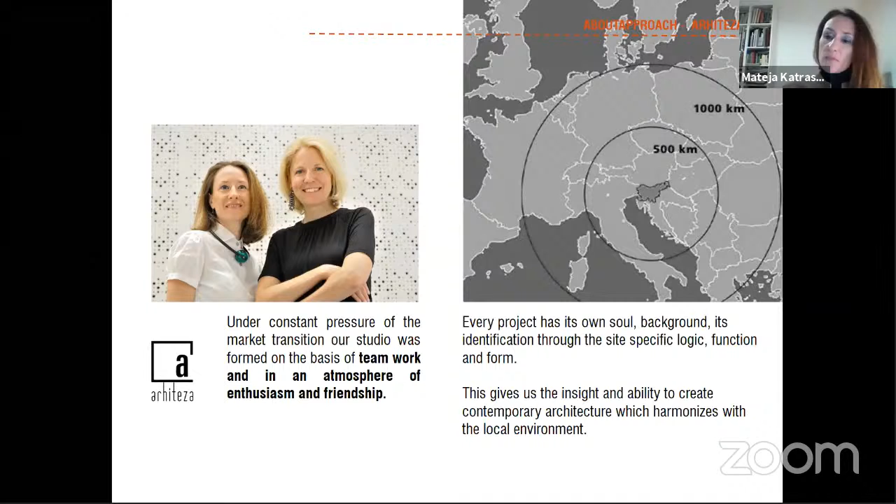We try to find background, we try to make identification through the specific site logic, function, and form. That gives us the insight and ability to create contemporary architecture which harmonizes with the local environment. This approach is very important to us.

So about the whole approach, we try to redefine the relationships between culture, environment, structure, and space. We take inspiration from visions of the future and traces of the past. Our approach is to find the most appropriate concept and try to create new value. Sometimes it's a redesign, and sometimes it's a research undertaking. Sometimes it's an evolution, and sometimes a revolution.

Now I would like to say some words about skate parks as architectural objects, because they are very specific. They are different to other sport arts.

Skateboarding does not have a particular standardized form, and that gives the designer, the architect, the freedom of expressing their own creativity. But at the same time, there are some standardized rules that have to be followed regarding set distances between skating elements. There are three categories of designing a skate park: bowl, street plaza, and flow.

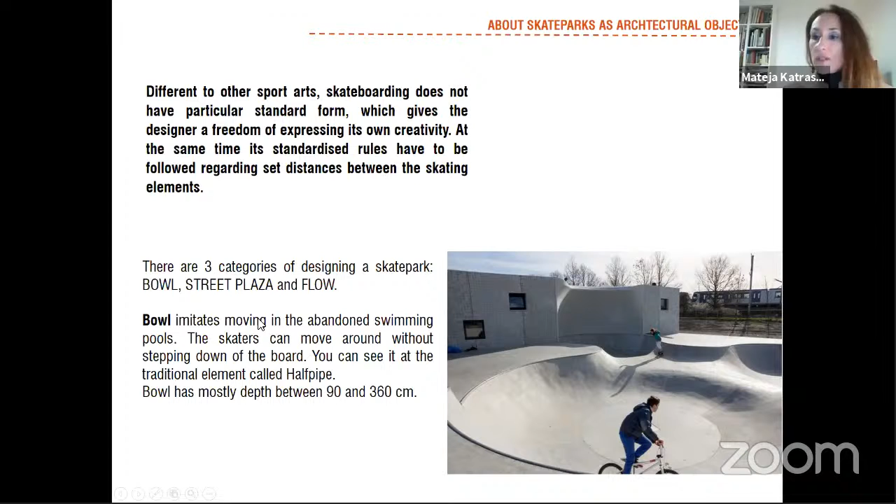Then we have two other forms. One is street plaza. This is a discipline where skaters imitate moving on the streets in the urban surrounding. They make tricks at various elements, and this is not as fast moving as in the bowls, so they also have to step down to push themselves to gain speed.

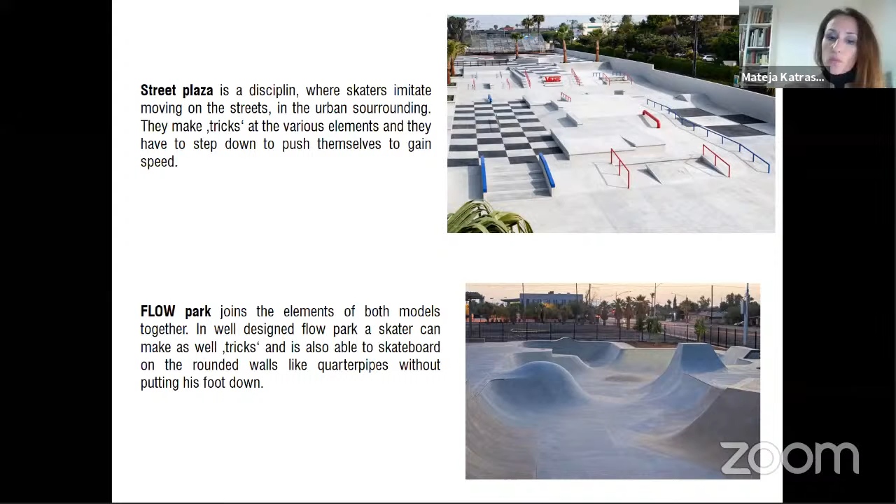Then we have the flow park that joins the elements of both models together. In a well-designed flow park, a skater can make tricks and is also able to skateboard on the rounded walls, like quarterpipes, without putting his foot down.

Now, let's say some words about Maribor, about Slovenia. Slovenia is a small country between Italy, Austria, Hungary, and Croatia. Maribor is the second largest city in Slovenia, located at the crossroads where various important roads converge. It is at the end of the Alps and at the beginning of the Pannonian plain, so this position provides the city a special character. In the former country of Yugoslavia, it was a very important city, a very important industrial center.

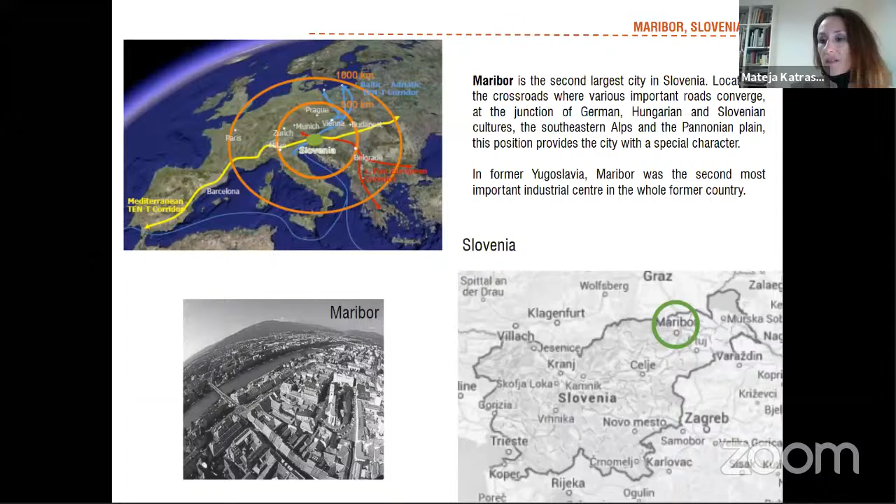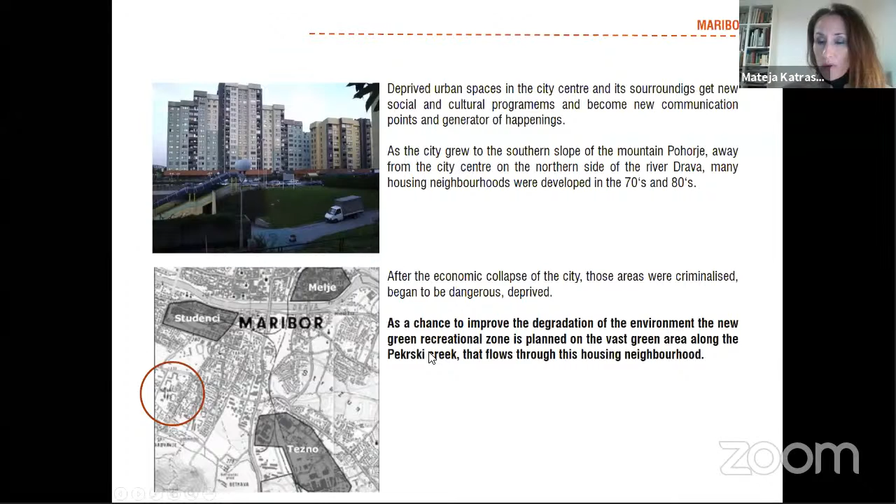Today, Maribor offers various opportunities for social and sports interchange. It is a historical, industrial, cultural, and economical center of the Styria region. The industrial collapse, deep concern regarding social problems, and somehow artificial maintenance of public standards are today more or less remembrances of the past, leaving an empty space for a new spirit that would provide the city with a unified, motivational identity and image.

Now let's come to the wider area of the location. The area of intervention is located to the south of the city. The skate park is part of the new green spine along the Pekrski Creek that runs through this urban area.

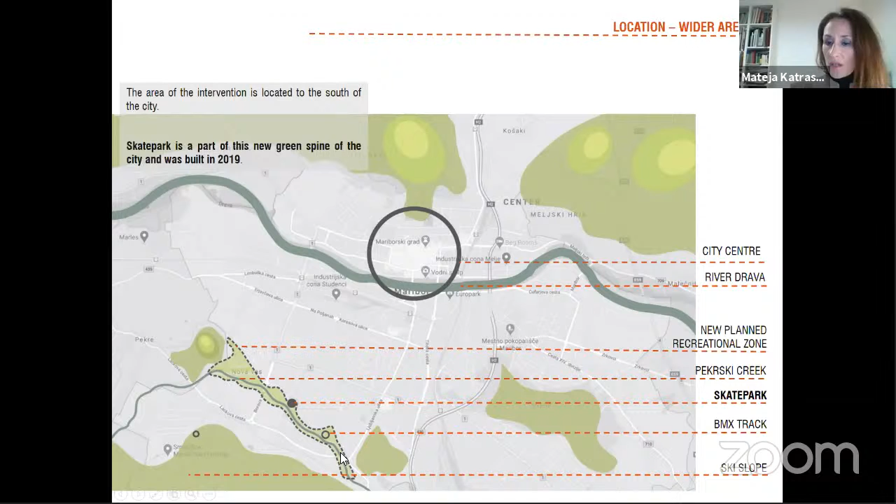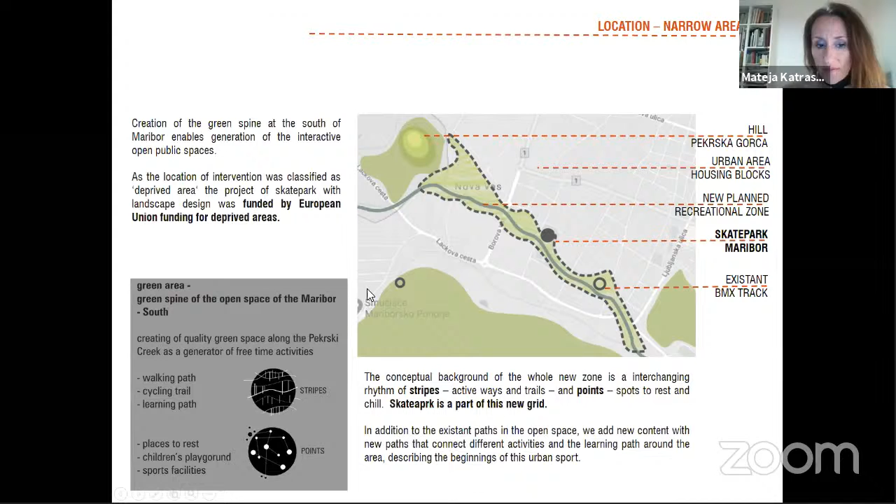Here is the location of the narrow area. We have a small hill, Pekrska Gorca, and an existing BMX track. In between is the new planned recreational zone between the urban area of housing blocks. Creation of the green spine at the south of Maribor enables generation of interactive open public spaces. This project, as the location of intervention was classified as a deprived area, was funded by European Union funding for deprived areas. The concept was living with the landscape and adding new contents along the recreational zone.

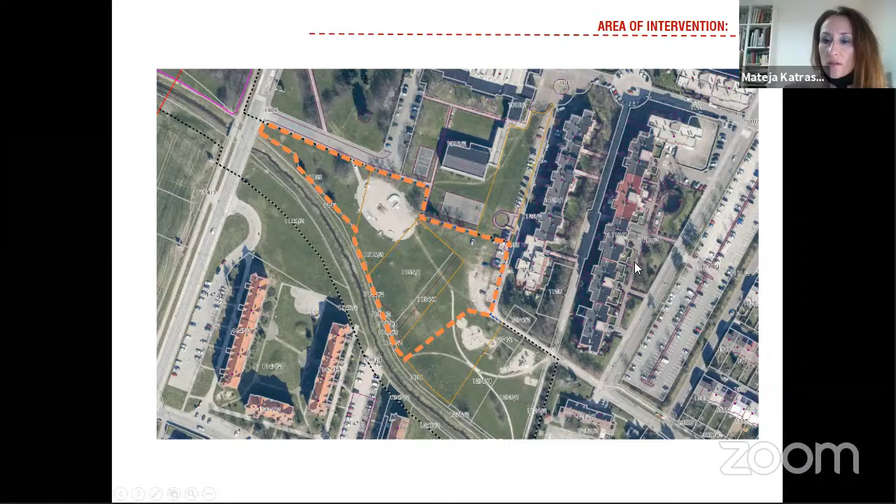Now, when we go closer, this is the area of intervention between housing blocks. We can see the zoning of the area. The concept divides the area into three zones. The central zone is the clubhouse, which appears as a connecting element between the two other segments. We have the children's playground and a new path with landscape design, and in light gray, marked the location where we put the skate park.

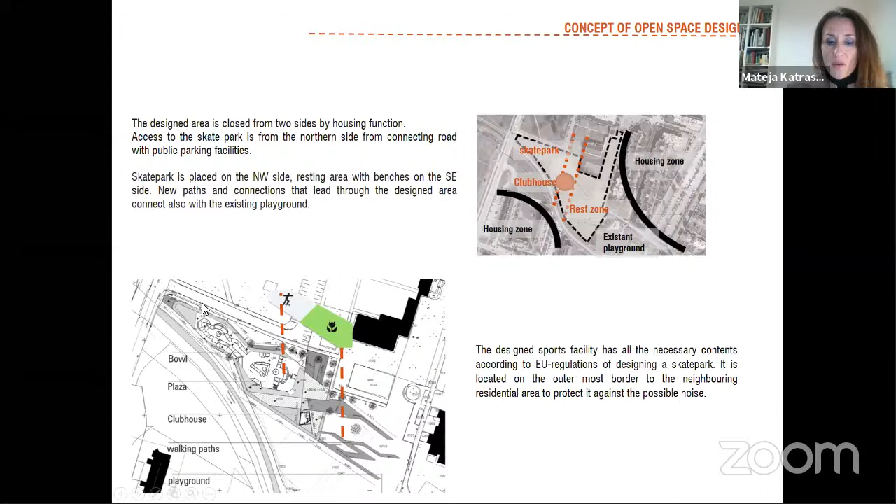The designed area is closed from both sides with housing function. Access to the skate park is from the northern side, from the connecting road, and with already existing public parking facilities. Here we can see the placing of the skate park and the landscape design, the concept of the open space design. In the western part we place the skate park. In the southeastern part we connect with new paths and new seating facilities, and we connect with the existing playground in the southeastern side.

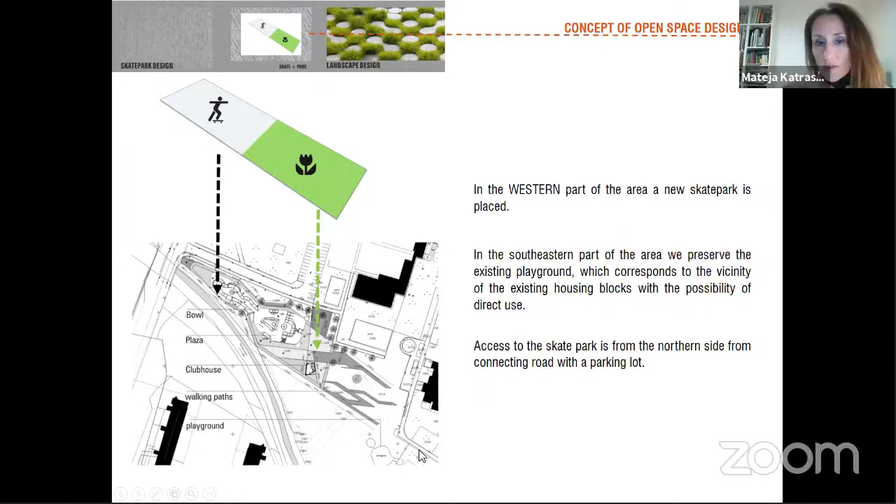To go wider into the skate park design, the design is based on the relief and natural features of the existing green area. The shape of the sport facility is designed according to the existing tree fund.

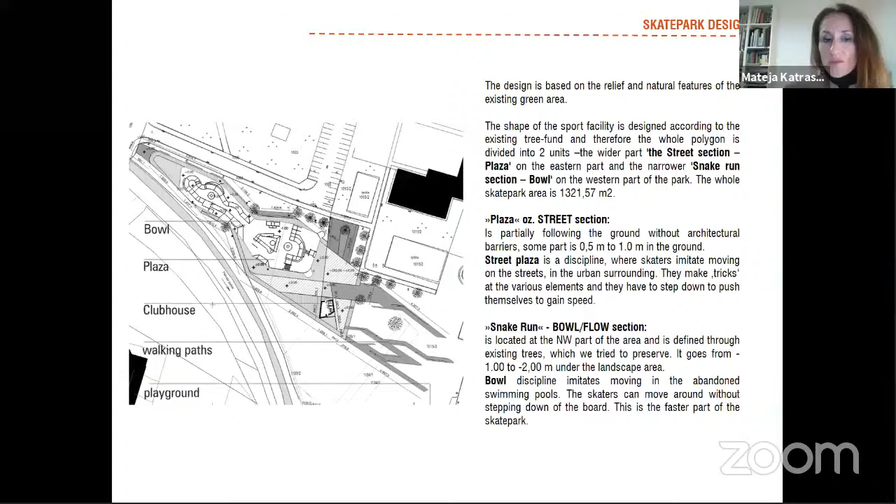So we go to the central part, a little narrower. We have two units, plaza and bowl. The plaza, or street section, is partially following the ground without architectural barriers. It comes from the clubhouse site and goes from ground zero minus 0.5 to 1.0 meters into the ground. Then we have the bowl, or snake run, in one part located in the northwestern part of the area, and this is the quicker part — here it's moving much faster than in the plaza.

Here you can see the skate park elements. It was designed according to European regulations and standards for designing these sport facilities, and also according to regulations, new public lighting was made, enabling international skating competitions during daytime with less sunlight. I have to say that from this year, skateboarding is also an Olympic discipline, so it should be in Tokyo next year for the first time.

Now, if we go to construction: this skate park is designed as in-situ casting of concrete on the spot. During construction, the shotcrete technique was used for injection of molded concrete with a thickness of 15 centimeters. This is the first object made with this technique in Slovenia. At the beginning, an excavation was made, and after that the construction was divided into two segments, the flat part and the oval part, each made separately.

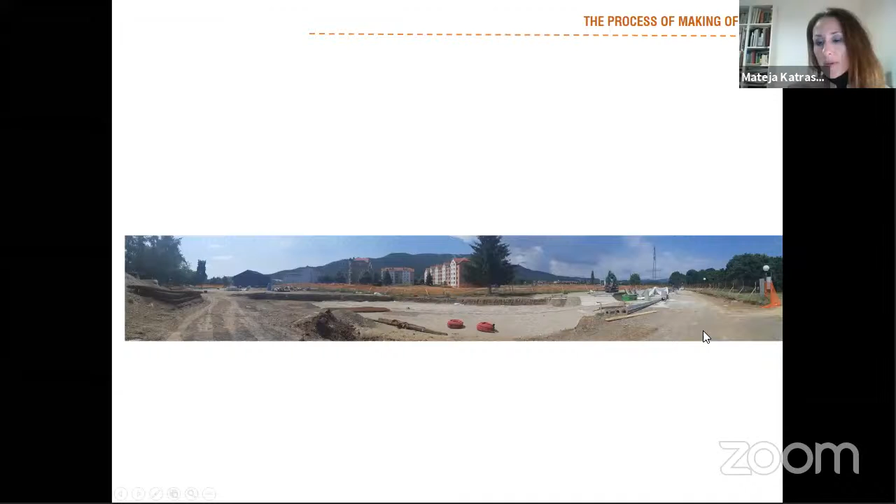Now we'll take a look at how it was made. These are the basic excavations that were made. You can see here the snake run part.

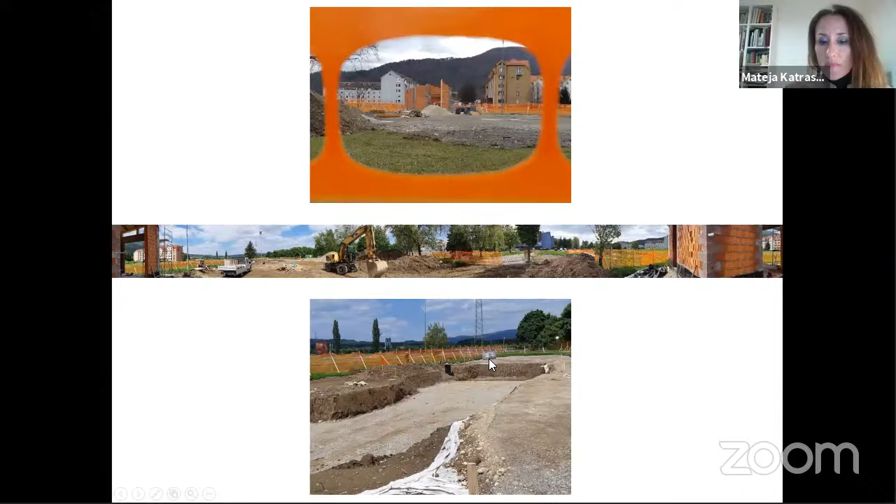What concrete has to be used for foundations? It was C16/20, and for riding surfaces, it was C35/45.

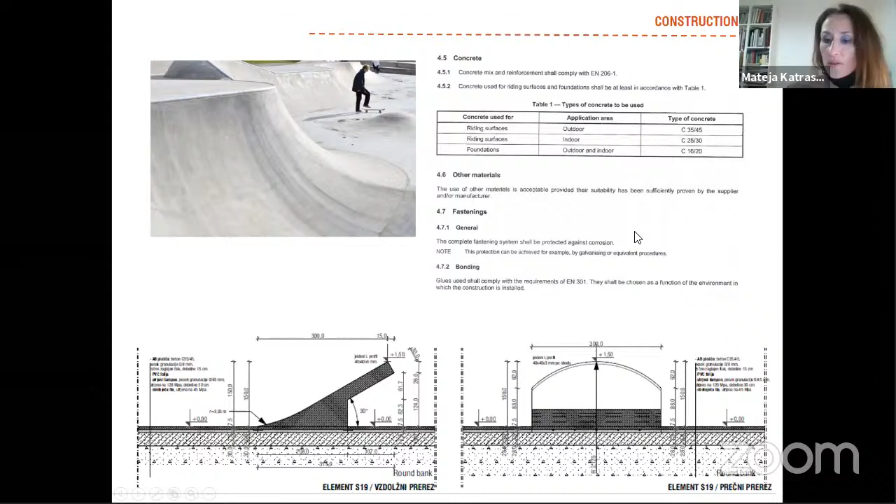First, oval and curved-shaped polygon elements were made with a hand-hardened tampon up to 30 centimeters thickness. You can see it now here. Then concrete C12/C15 was placed on the manufactured shaped curves with a specific radius so that the shaped elements retained their shape. The shapes were formed from wooden formwork made by carpenters, all made with a standardized radius.

You can see here also the coping. This is called the coping, and it has its own punctual foundations. This is from the construction site. On this side, the snake run was made first, and then the plaza.

Then the final layer of concrete is of quality C35/45 and contains additives to prevent freezing and corrosion. The reinforcement is located in the middle of the final layer and has a protective layer of approximately 7 centimeters of concrete. You can see here these reinforcements that were made.

Elements designed as ramps, you can see the ramps here, featured a minimum radius of 220 centimeters and were made at the bottom at the junction of the ramp with the flat part of the reinforced concrete slab to allow better passage. A final layer of C35/45 quality concrete was laid over the base concrete you see here.

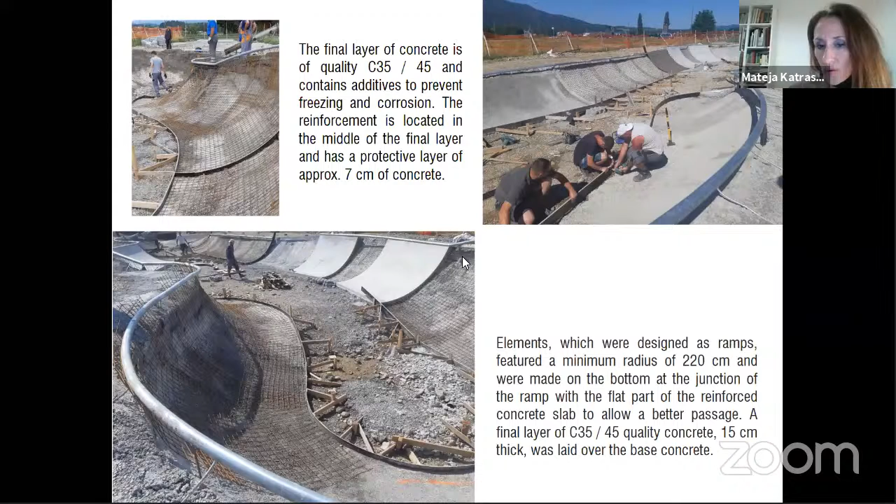So these are some photos from the construction site. You can see here is the coping, and here are the oval parts. They were made, and the final touch was all made manually - this was all handwork, the final layer. And here you can see how the coping fits into the oval part.

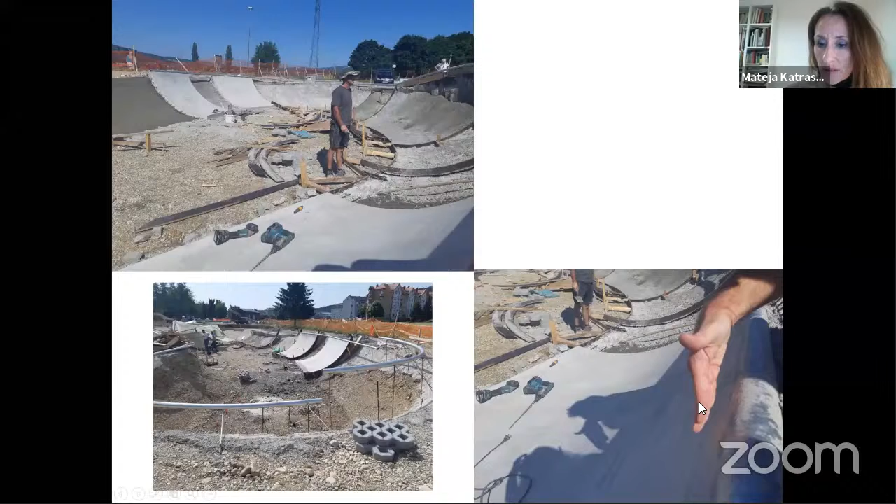So now we will take a quick look at how the construction was made.

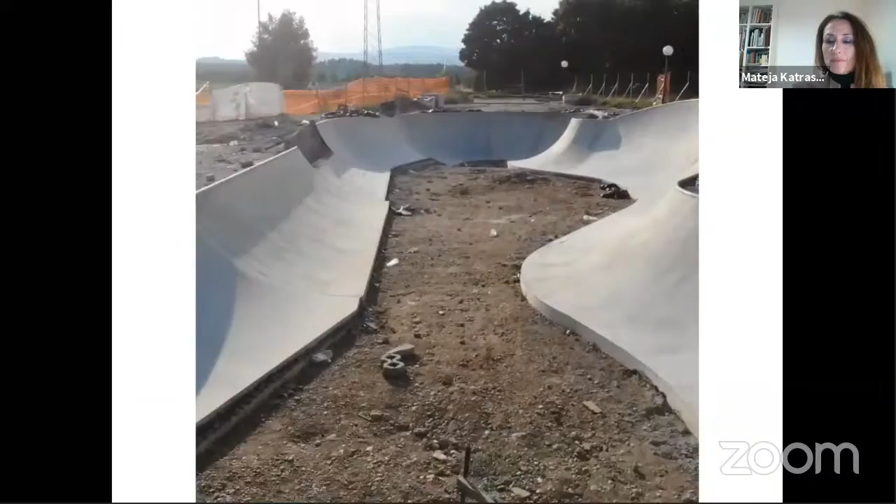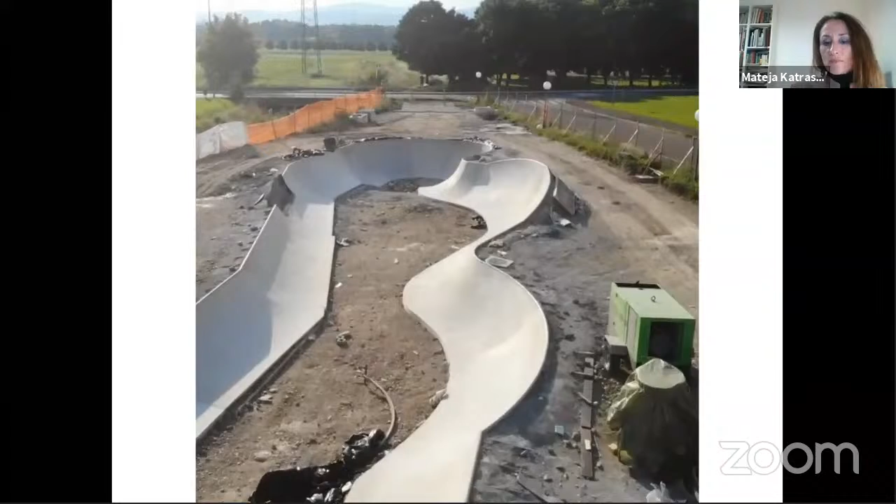So you have seen that in this movie, the oval parts were already made, and then it was time to make also all the flat parts. You see here the northwestern part, the fastest part of the skate park. It is called Snake Run with a deep bowl.

So this is the detail of how the coping is made. This is coping, and the edge part is called ledge.

So now we will see a short movie where already the flat parts were also made.

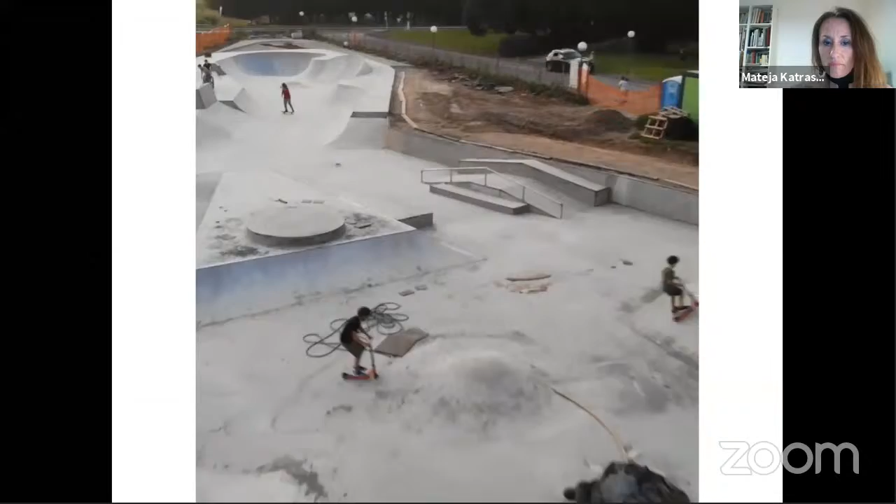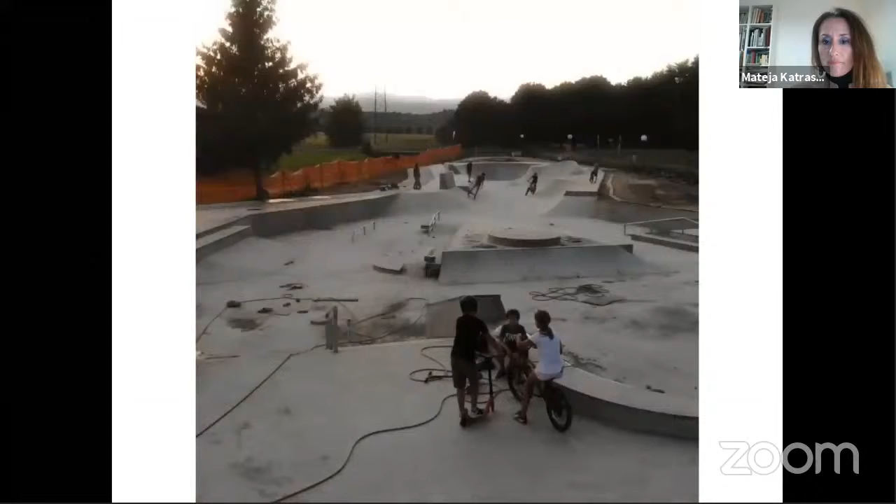You can see here the green belt, the green area. You can see the housing around, and this is the clubhouse. Here the landscape design will be made.

This is the fast part, the bowl, snake run. And here it is the plaza, the street part.

Then additionally in the southeastern part, we made some landscape design that follows the basic idea of placing the skate park as a sports park in green.

Materials that we used here are polished concrete, washed concrete, asphalt, and in this eastern part they are combined with grass concrete pavers. We took them because they enable a soft transition from the pressed surface into the grassy area. In this manner, we tried to blur the boundaries between the green landscape and the new urban landscape, which we artificially create.

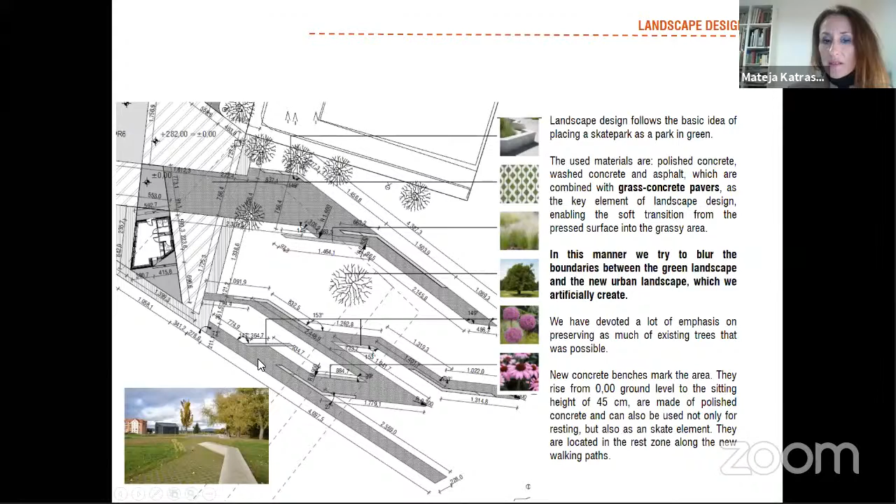They are made of polished concrete, and can be used not only for resting, but also as a skate element. With BMX, they are driving on them now, and they are very, very good in action. They are located in this rest zone along the new walking paths.

So we see here the making of those new paths, making of those new benches that go along the skate park and along the landscape area.

And then when the grass came out, this was the manner how we tried to blur the boundaries between the green landscape and the new urban landscape.

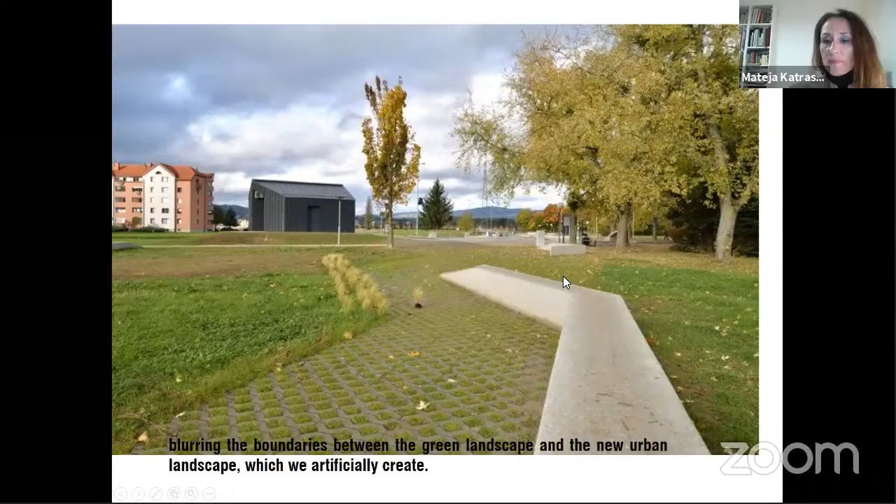So if we say some words about the clubhouse, we have a small clubhouse due to spatial regulations of the green area. We could only build the object to 50 square meters.

It contains communication space and a service area with toilet facilities for visitors and for employees here. It is used by the local skater community and also for referees during various competitions. The metal sheet facade cladding allows a holistic solution of uniform monolithic structure.

So this is some views of the clubhouse. We extended the sport area of skate park also into this part so that we made as much concrete surfaces as possible. So on these flat concrete surfaces, they are having now skateboarding school because they start on the flat land before they dive into the deep, so we could say.

So those are images of skate park as was already put in use. We see here the street plaza area with various elements where they make tricks. This is, for example, big hubba. This is small hubba. This is China wall. They have their particular names. And you can see the benches here around that are also used as a bench or as a skating element, additional skating element.

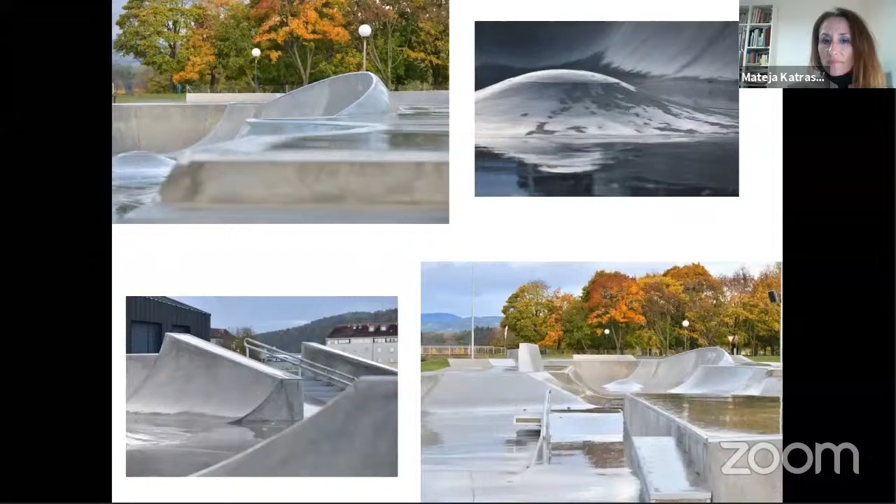It has new quality. You can see the plaza part here with round bank. You can see the benches here and the landscape design in the back, clubhouse in the middle. Here are the stairs as a seating also facility and for jumping. This is the part for skateboarding school.

From a landscape design perspective, this is the largest skate park not only in Slovenia, but it is the largest skate park from Vienna to Athens. It generates new public space in a green area. The deprived part of the city gets the new starting point for the regulation of the new recreation zone along the green belt.

The new object is a milestone for evolution of a growing skating community in Slovenia. Therefore, this project directly increases the quality of life in the neighborhood, while it also represents an inherent seed for bringing skateboarding to a higher level in the entire region. The project therefore fulfills the objective of an important asset to the city of Maribor by offering citizens a creative social space for yet unexploited opportunities and raises the spirit of the site while engaging the community.

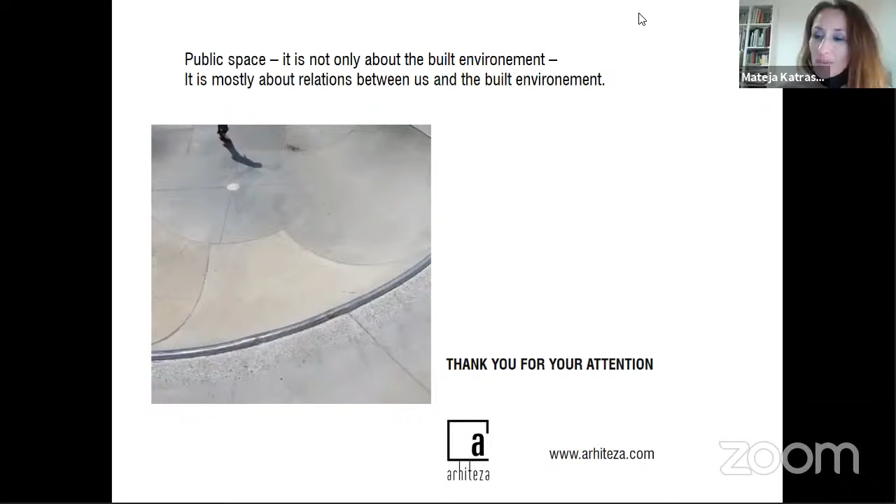Any other questions? Rainwater. Polat, can we see the question? If Polat would...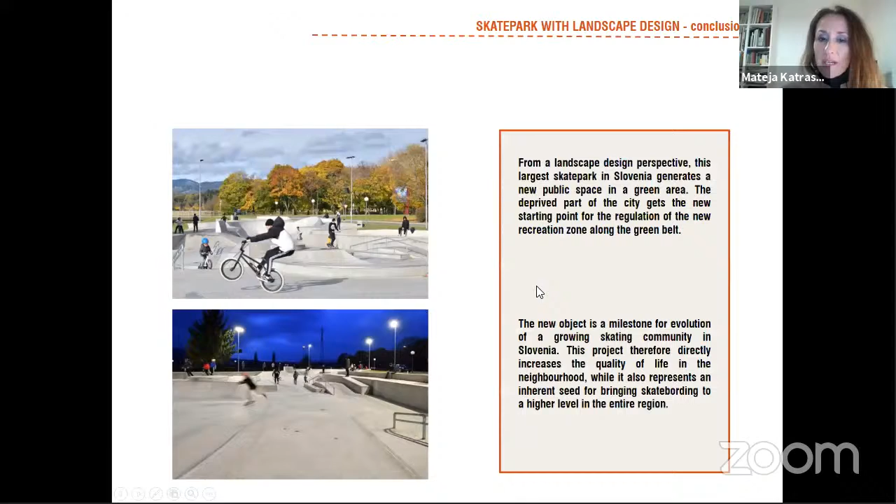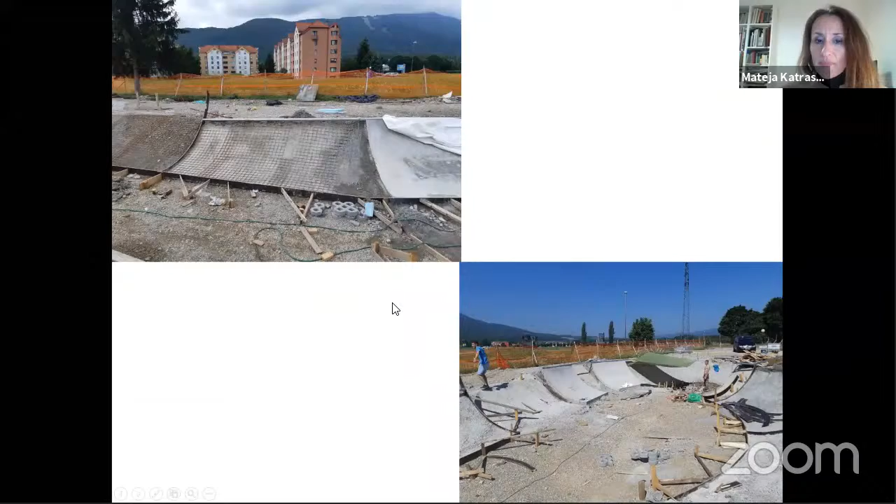I see the question, it is about rainwater. I'm sorry I did not put all the floor plans, because maybe it's seen somewhere. We have a very good draining system located here, and here, and here — on seven parts the draining system goes into the local city draining system. Without a draining system you cannot make a good skate park, because it has to function. After the rain it has to dry as quickly as possible so it can be used.

Polat Darchin is one of our associate professors at school, in materials and building components. He's asking if there are heat or vision problems due to sun exposure. No, there aren't. We have a normal climate, not too hot. In summer it's about 30 to 35 degrees, not more. But the concrete has additions for freezing, because we have hard winters in this part. So the draining system is therefore important as well.

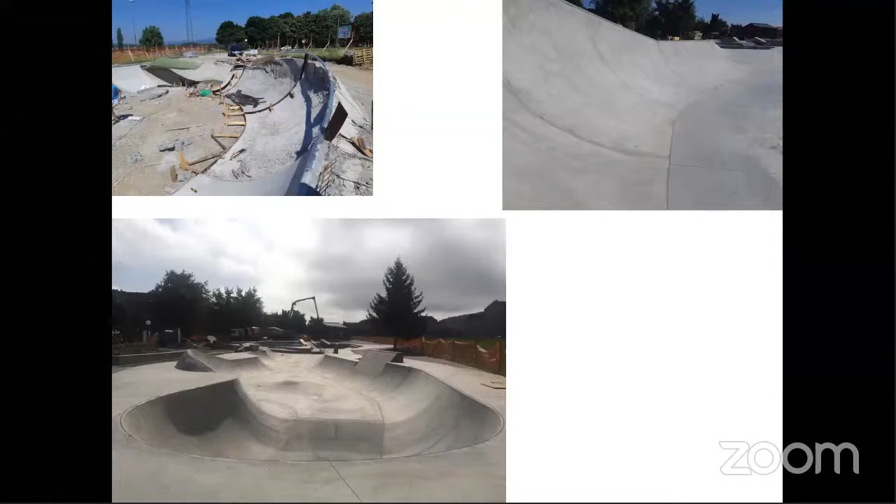Thank you very much.

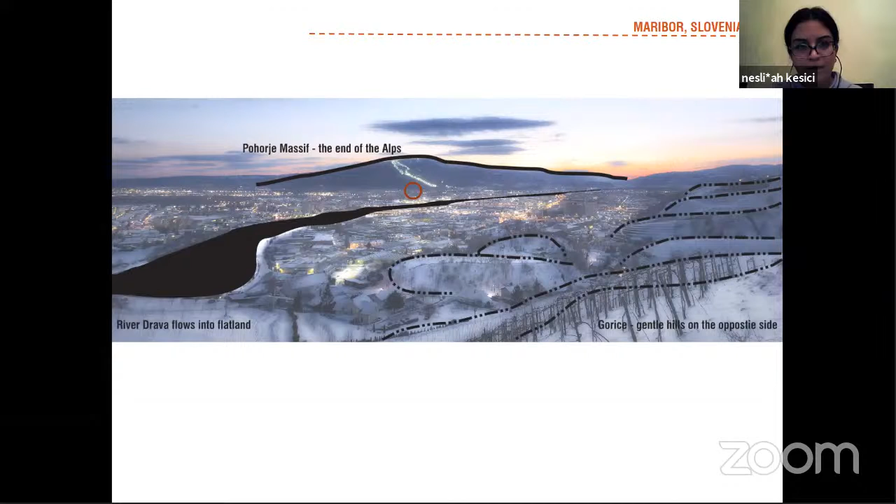We tried to extend the area so it could be used not only by skaters. Nowadays modern children are not so much alone outside, they are more with parents. So we also made a clubhouse with sitting facilities, because parents come too, but not ordinary benches - we made benches that can also be used as a skating element or BMX element. So it is very, very good in use.

So this is the best somehow - you can get awarded by institutions, but when you get awarded by everyday use, this is something really, really nice to see.

Yeah, that's right. I mean, all the awards are there as an object, but to see what's happening there, to see the joy of people using that space - that is probably the best thing, right?

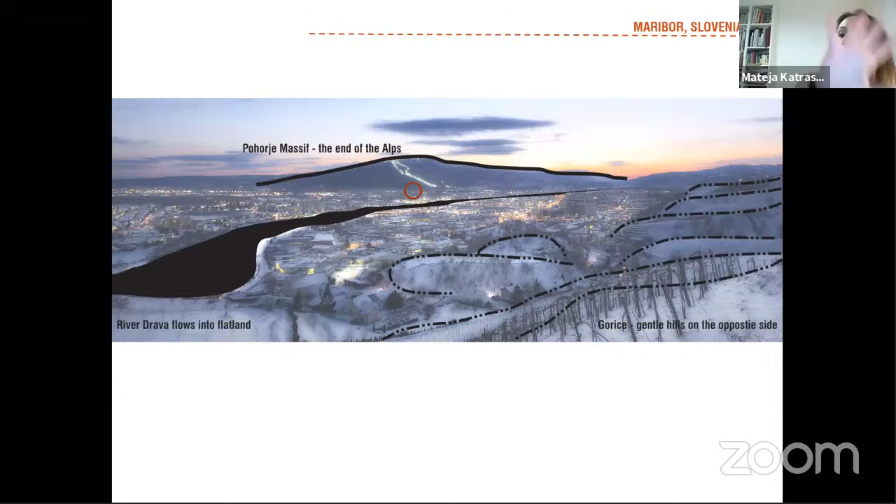This was a whole new technique, something very new here. At the beginning we had to stop construction for a short time because of those problems. The constructor had to bring in guys from Spain to help, because the whole round oval part you saw, the final layer, is handmade—they move with their hands on the concrete so the cement milk comes out, and it's really some very nice work of art.

We call this concrete poetry—but you have to know how to do it. If you're an ordinary constructor, you only count the amount of concrete you need and forget all this fine tuning. So for the fine tuning, they had to contact really good experts from Spain who helped them and also taught the local guys how to do it. This was the biggest problem, along with finding the shotcrete technique machines—they got those from Vienna, since there weren't any in Slovenia at that time.

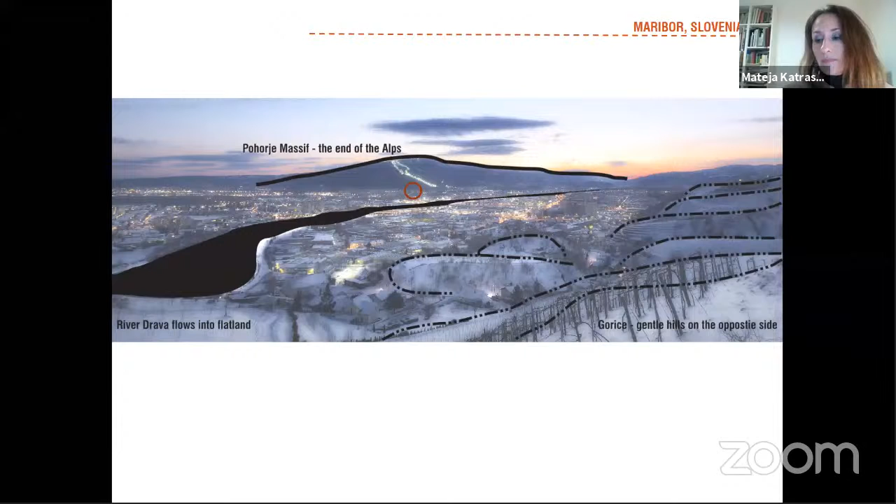Wow, okay. So, Ebruca.

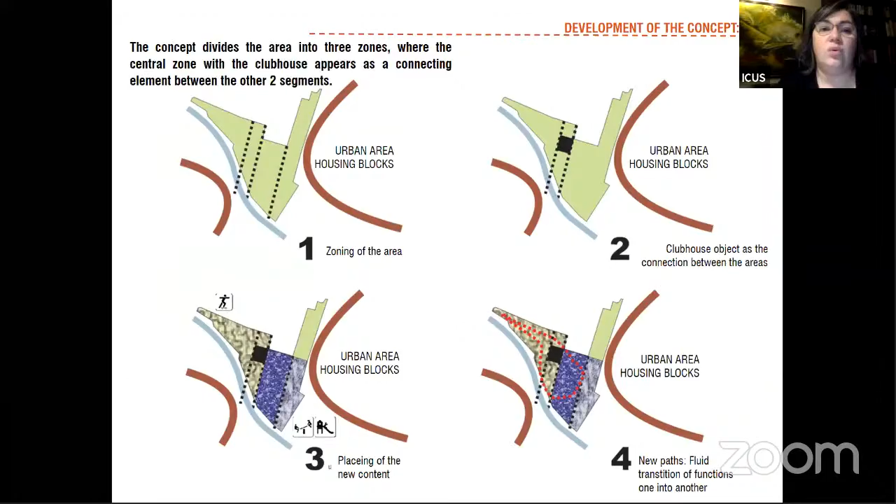Hello, good evening, thank you for your presentation. Were there any other traces besides these existing trees which should be kept on the site and formed your design? Because you mentioned it was designed on site, in situ.

So this was construction in situ, on site—the construction of the concrete, this molded concrete technique, is called the in situ technique. As for the design, you see here and here are existing trees, and this is the tree. Because of this tree, we made it narrower. Here was another tree, a very nice walnut tree, but it was already a bit sick, so we had to remove it during construction. Also, it's not so good for a skate park to have trees that drop a lot of leaves, because in autumn the draining system can quickly get full because of the leaves.

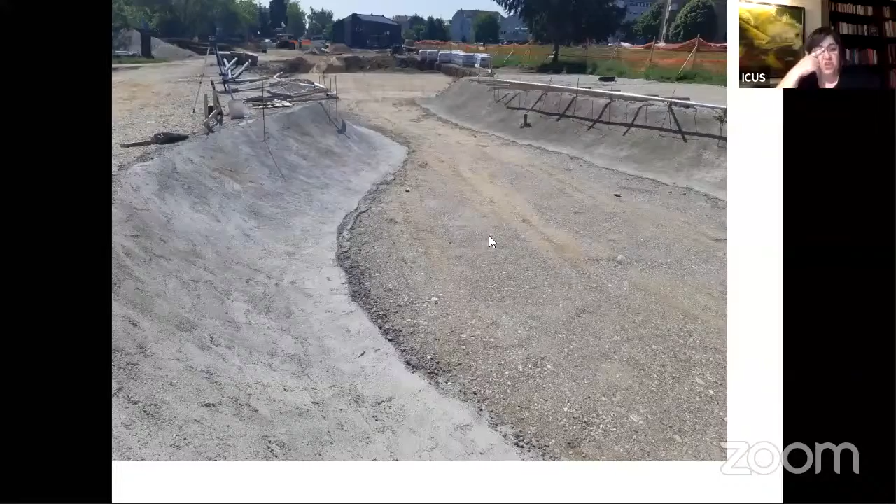So the nature was actually the only trace to be followed? Yes, trace to be followed. If we go back, you see this tree was removed, this tree is here now, and those trees are all here—they also provide shadow on these newly made benches. So this is the side shape, and the shape that narrows in the middle is because of those existing tree trunks. Thank you.

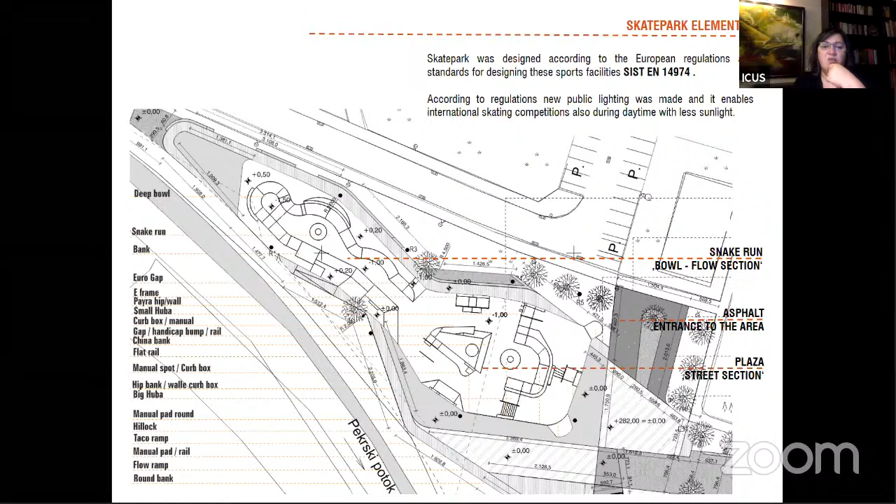Regarding the concrete, there's a question from one of my students, which we can also ask on her behalf: when designing a skate park, concrete is used, of course, but for those learning, or the younger kids, concrete might be a problem. Is there another way of designing it with a different material?

Of course. Skate parks can be indoor or outdoor. For outdoor, the best solution is concrete, because it lasts longer and you don't have to put much effort into it. You can make a skate park from metal parts or wood, but those are prefabricated elements you put on concrete or asphalt or whatever. But skate parks with a bowl like ours, you cannot make in another material—well, you can, but it's very hard to maintain when you have rain or snow. Wood is more likely used for interior skate parks.

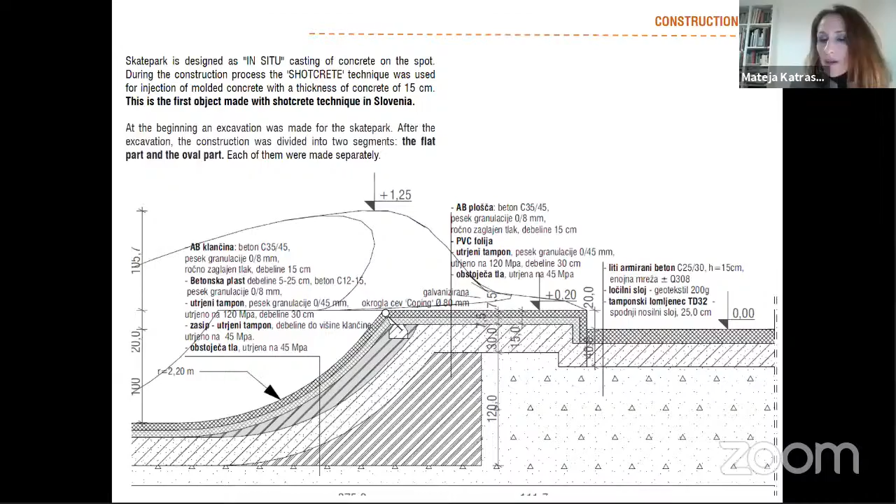As far as I could understand, there's also a part for beginners in front of the clubhouse, a place to learn first before entering the faster tracks inside the park. Yes, exactly, it's on the area around the clubhouse, and that was the purpose why we made it that way. On all this part around the polygon is...

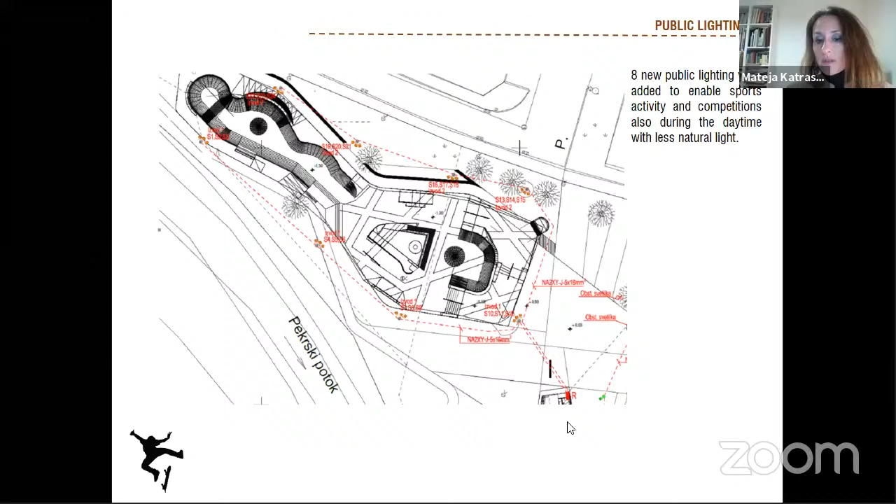The best way is to see the movie—on the movie we can see the whole area.

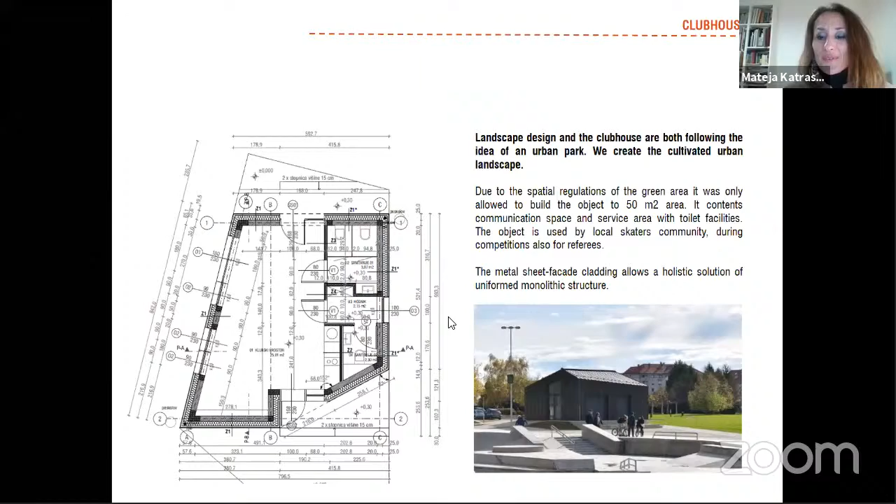Another question comes from Ömer Ulusoy. Would you like to ask yourself, Ömer, or not? Can you ask, please? Okay.

It's a very nice result of this project. Was it planned to be so successful? Did you already sense while designing that this was going to be a huge success at the end? And what were the parameters, the features you chose in order to make it a big success? What would you say about that?